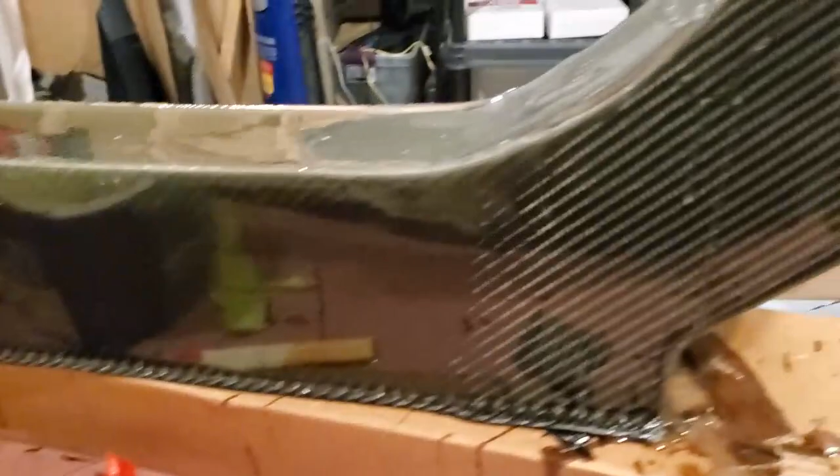Let's show you what we're doing and take a look at some more 3D printing. One of the things we've been doing is this threshold. We've been putting more epoxy on it so we can sand it nice and flat. Also had to fix some distortions, so we covered them up with carbon fiber, but it's looking pretty good, and it's going to get nicely sanded once the weather cooperates with us. As you can see, we got a really nice carbon fiber look to this part.

And we're working on getting the door skin. I'm not going to go outside because it's all really cold out there, but we're working on the door skin and getting that all matched to the rest of the panels.

In addition, we're doing some 3D printing. So you can see my printer's going in there. And what is it printing? Well, it's printing basically another rear bumper.

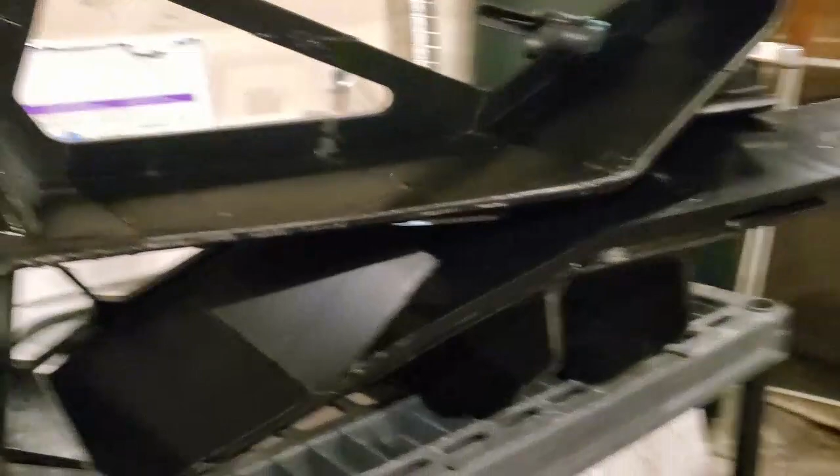Now the reason I'm doing this is there's a couple of reasons for it. First one is that the bumper that's out there on the car is pretty heavy due to a lot of epoxy going into some of the inclusions and things like that. So what I've done now - it's also printed out of PLA, so it had a lot of warpage to it out in the sunlight. We got all those things fixed, and the panels all painted and everything.

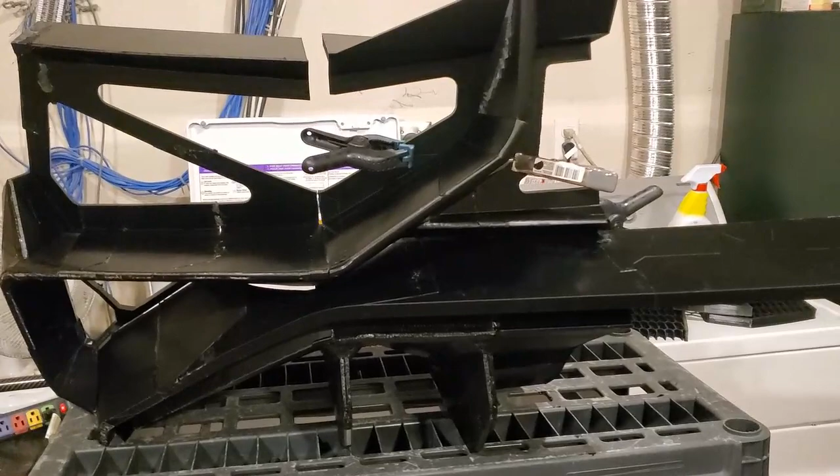But what I wanted to do was get more of an OEM look, so I found a better model for the SV. I actually found it kicking around on the internet, and then I went ahead and used it to make my model in SolidWorks. So that's something you can see here.

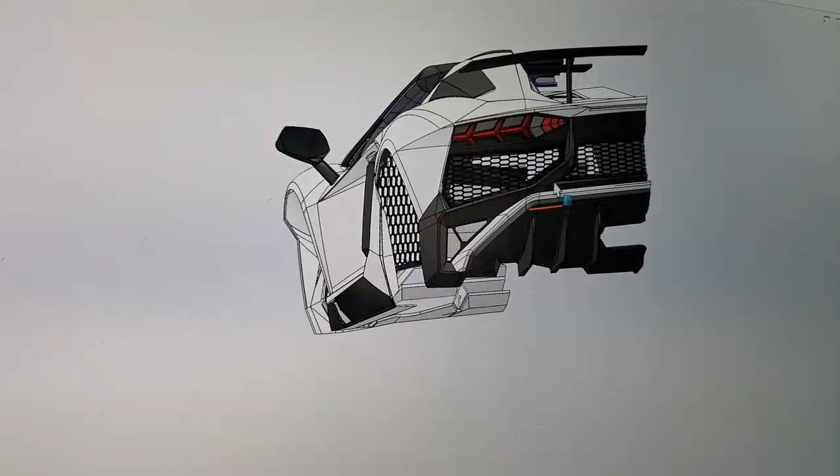So you can see here's the model. It's basically only half of a model, because when you 3D print you only need half. And there you can see the rear end that we're printing right here, plus this white piece, which is that separated piece I showed you.

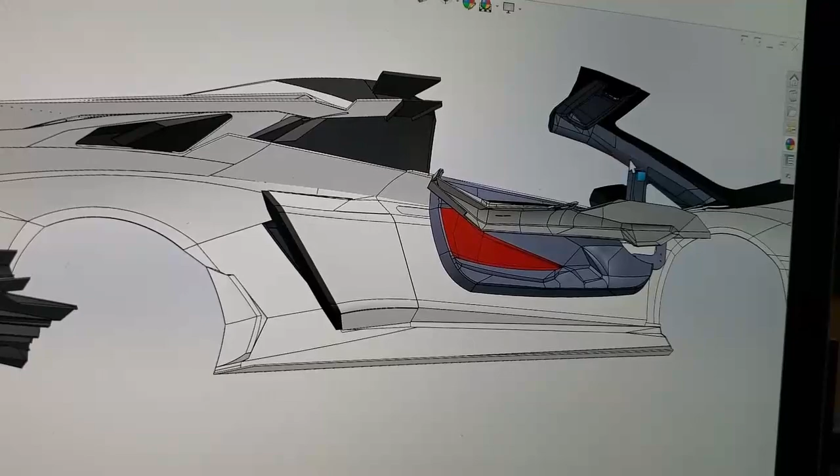And you can see that we're doing also some of the interior parts. So the door card, the consoles here, and then we also have some of the interior bits here that we're going to need to 3D print.

Also the nice thing about this model is the door opens. That way we can make sure that we have clearance and that we put the hinge in the right spot.

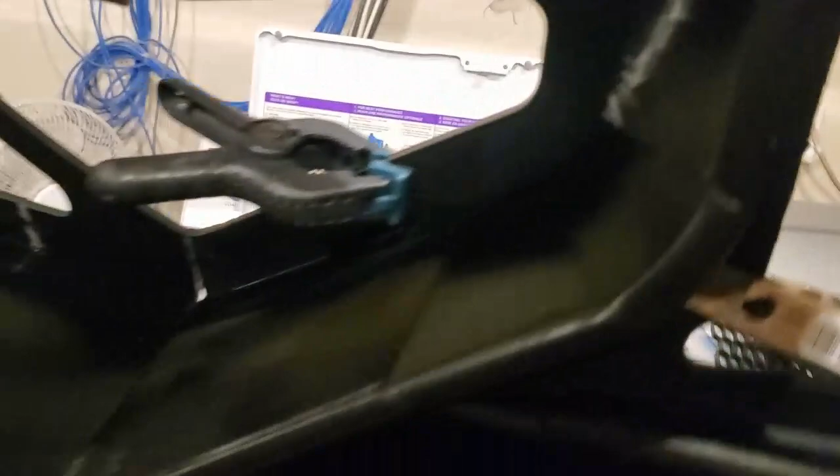So I've been slowly printing these panels for doing a new rear diffuser and rear bumper. Obviously it's not complete. One of the new different things about it is that it comes in a couple of parts - it actually comes in this bit right here and that bit, so they actually separate. It's somewhat close to what the OEM parts do.

So we're going to reprint that out, and then we're going to try a new technique for skinning it. I'm going to skin it one section at a time. What we're going to do is sand it down, and then probably epoxy the whole thing - put a layer of epoxy on it, and then we'll put a layer of carbon fiber on top of that, just to hold it all together and make it look pretty. So we'll see how that goes.

But since my printer's been not doing a whole lot lately, we decided to go ahead and try this scheme out. It also means that I'll be releasing a new model at some point where you can go ahead and get the SolidWorks files for a lot of these components, and we're also going to include with that the interior bits that we're printing, like the console you saw.

Also, we're doing some other prints. So a quick and dirty update - sorry I don't have more, but I'm sure you can understand since we had an absolute ton of snow, and snow blowing it was like snow blowing concrete.